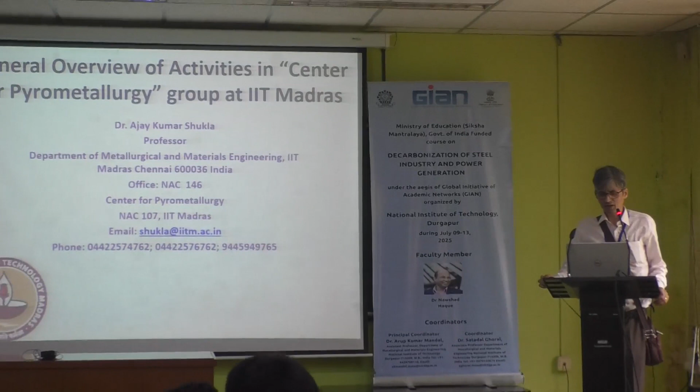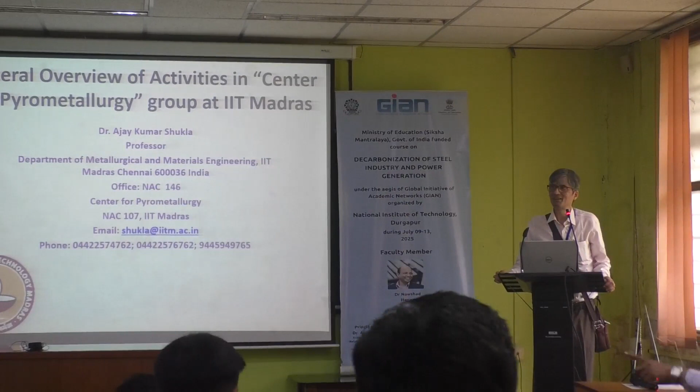So, anybody from DSP? From which shop? Same shop, oh okay. Yesterday I talked to you, and your chair has been taken by him. So basically, I'm in IIT Madras since last 12 or 13 years, working as an academic. You are from ISCO? From which department? I am from power distribution, he's from filter plant, and one guy is from blast furnace. Oh, who is from blast furnace? Yeah, he's coming, he's from Boston.

It is very great to find the blend of scientists, experts from industry and from academia, working in different areas of the iron and steel making supply chain.

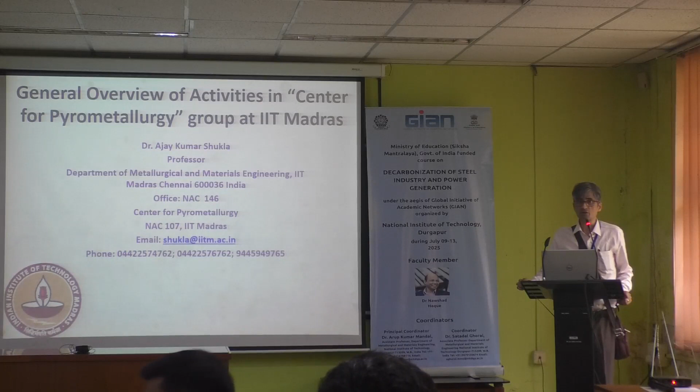Today my discussion will be focused only on the kind of capabilities which my group has, my group had been involved in over the last several years at IIT Madras, as well as due to my past experience in industry and ongoing collaboration with industry and research organizations of international repute like CSIRO, with whom I am working on one of the potential projects of iron ore beneficiation, particularly utilization of synthetic iron ore in the blast furnace.

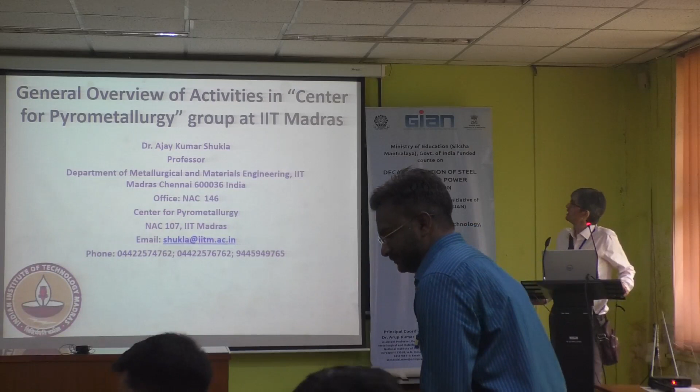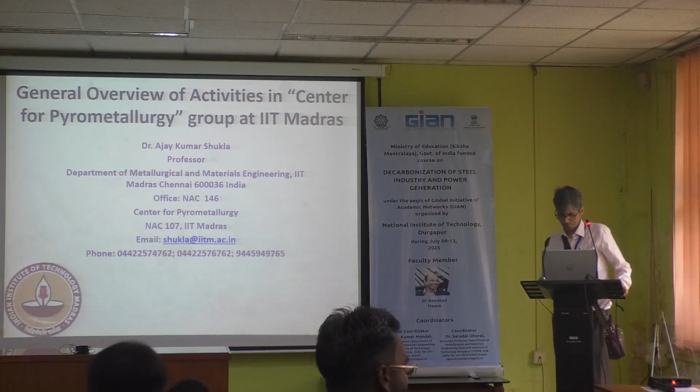So this is the general overview of my activities in my group, that is also named as Center for Pyrometallurgy very recently. This is the general overview of the research theme of my group.

I started my journey with this process metallurgy, particularly modeling, control, and optimization of the iron and steel making area, because initially I was working in the steel making shop at the steel plant, and I took a very deep interest in automation systems, which had a lot of control models that were part of the level 2 automation control system.

As a fresh graduate from IIT, I had a lot of input and background because of my education from IIT Kanpur in those days, and I found it very fascinating. So that is from where I developed my interest in modeling, control, and optimization related aspects.

That involves a lot of mathematical concepts, understanding of concepts related to process metallurgy, and then wrapping all of them into the form of a mathematical model. A lot of programming is also required. In those days, I was doing programming in Fortran, then later on...

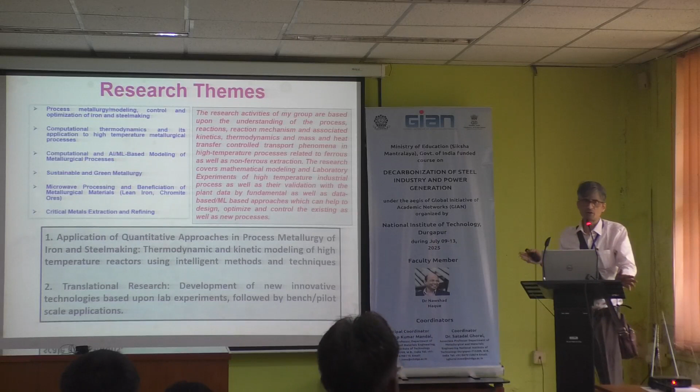I started doing programming in MATLAB, and now there are a lot of programming tools available, particularly for thermodynamics and flow and resource optimization related work. So a lot of tools are there, but my focus is not just to talk about what software has been used, but more on the underlying very basic concepts and principles which are very much relevant to all these areas.

So this is computational thermodynamics and its application to high temperature metallurgy processes. Obviously, understanding of high temperature thermodynamics is an integral part for any extractive metallurgist.

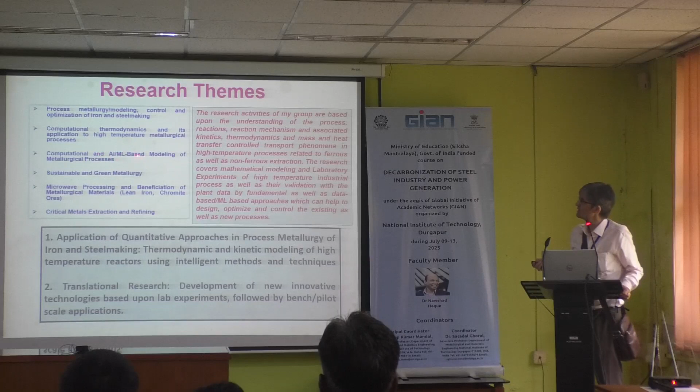Then application of computational models—earlier they were called data-based models, now people call it artificial intelligence, AI, and machine learning based models. Steel plants actually have a lot of data, and there is no shortage of data; data are coming from everywhere.

Data are coming from the field equipment, from one batch of the process to the other batch of the process. Data are coming every second, transient data in terms of various measurements like pressure, temperature, flow rate, composition of waste gas, all those things.

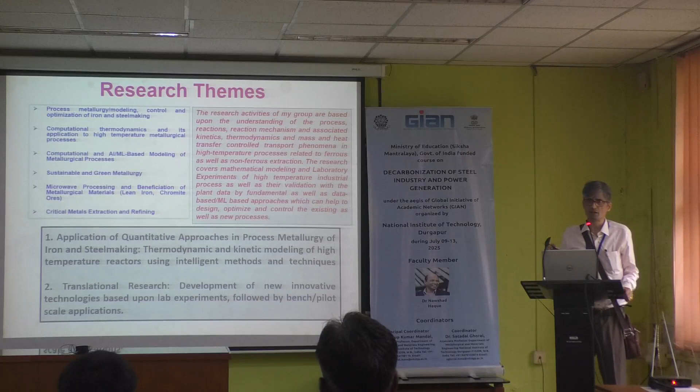So basically we are generating a lot of data, and somewhere those data are going to be a valuable tool to understand the behavior and dynamics of the process. Earlier people were thinking about doing that, but it was difficult because of the limitation on the computational capability of machines. But today we have high computing machines and a lot of development on the front of machine learning.

So basically, we can use this data for understanding the process and its behavior, its dynamics, and suggesting the most appropriate way of working in an efficient manner.

Of course, today people are talking about sustainability and green metallurgy, whether it's green iron making or green steel making, everything is green actually. We don't want carbon anywhere. But how to get rid of carbon in a step-by-step manner is also a challenge, because all the past technologies have been developed based upon coal only. So that will take time, but that has to be done.

One of the projects I have recently worked on is microwave processing and beneficiation of metallurgical materials, particularly lean iron ore and chromite ore. I have also been involved recently in the study of critical metals extraction and refining. I do not have any project right now, but we have the scientific capability, and subject to a tie-up, we can definitely get involved.

So overall, my research activities are based upon understanding of the process reactions and mechanisms, associated with thermodynamics, kinetics, heat and mass transfer control phenomena in high temperature processes related to ferrous and non-ferrous metallurgy. This is my overall capability.

And the research not only covers mathematical modeling and laboratory experiments of high temperature industrial processes, but also involves data coming from large scale industrial processes, if I develop any model for a large scale process like blast furnace, oxygen steel making, or matte smelting process.

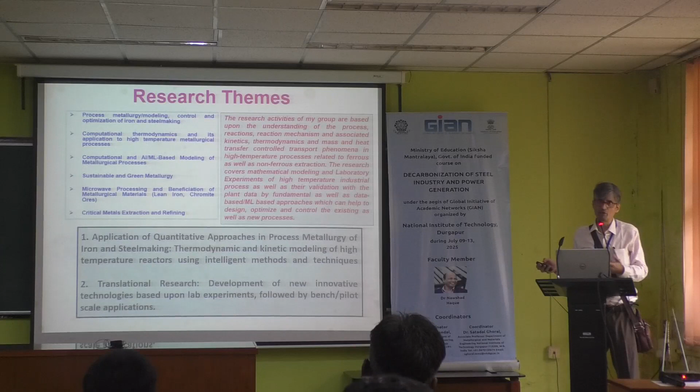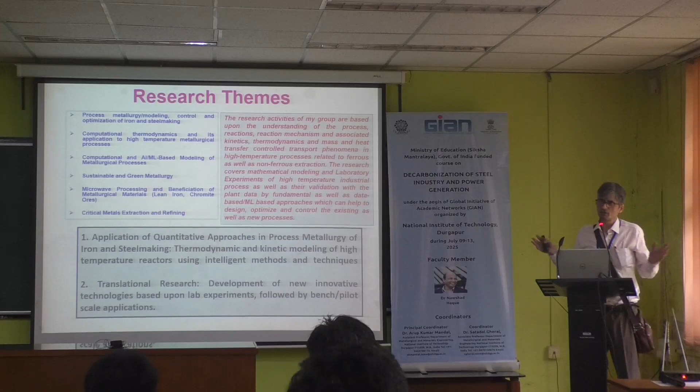I do not know up to what level I will be able to go further. That depends on the support from various institutions, funding agencies, and others. But I am always open to ideas which have been defined in this very broad scope.

So far, these are the projects which I have indicated earlier. The ones in red are, I think, the ongoing projects which have recently been completed or are still ongoing. That means comprehensive mathematical modeling development of the oxygen steel making process, modeling of Midrex iron making process, and industrial validation. These are the projects which are part of the PhD.

Can you kindly explain point number 3? What kind of modeling has been done in iron making, mostly related to blast furnace?

This is a data-based modeling approach to control iron making. Some time back we have taken some data. As far as our capability is concerned, we are able to model and simulate the entire blast furnace reactor by dividing it into a number of zones.

The blast furnace is a combination of a gas-solid reactor on top, followed by a smelting reactor, which is also connected through a combustion reactor. All their mechanisms and interactions could be integrated together in the form of a mathematical model, or as independent thermodynamic modules developed using thermodynamic software, then integrated together through the kinetic flow of streams.

So we have the capability that if you have the industrial data, based upon that data it is possible for me to predict how much coke is actually going into direct reduction, how much is going into indirect reduction, and what is the efficacy of each.

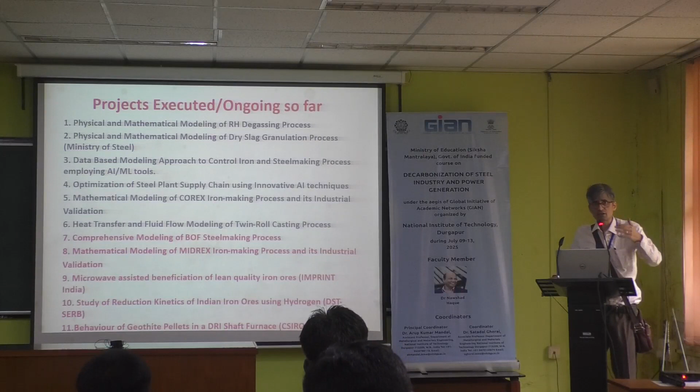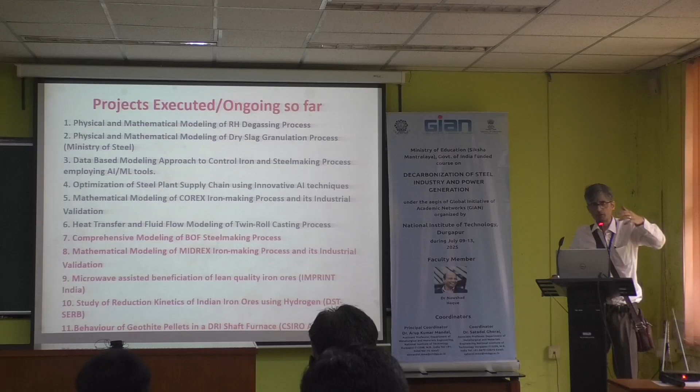But this is not just limited to modification on one front, because the person operating the plant knows better. A lot of things depend on the raw material characteristics, raw material size distribution, the burden preparation, the blending, as well as the sequence of charging. So basically, what problem is there, and where the particular stress should be focused, could be identified. But then it is the job of the steel plant operator to try various possibilities, starting from changing the raw material configuration, and then step by step looking at other aspects. So any process improvement is not so straightforward, but yes, we can identify certain things.

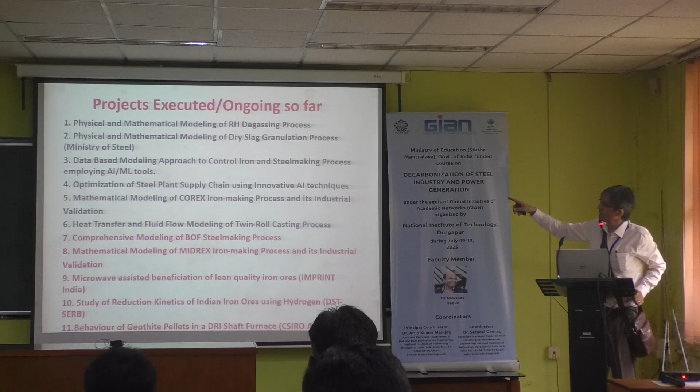Okay, yes. And then again, what I am talking about, the data-based model. The fundamental models work in association with data-based models. That means you cannot incorporate each and every part of your process in a fundamental model, particularly your heat losses. A lot of heat is being lost and the process duration is longer. If you cut down the process duration, your heat loss could be brought down. So any process could be made more efficient if its kinetic rate is increased or its time brought down.

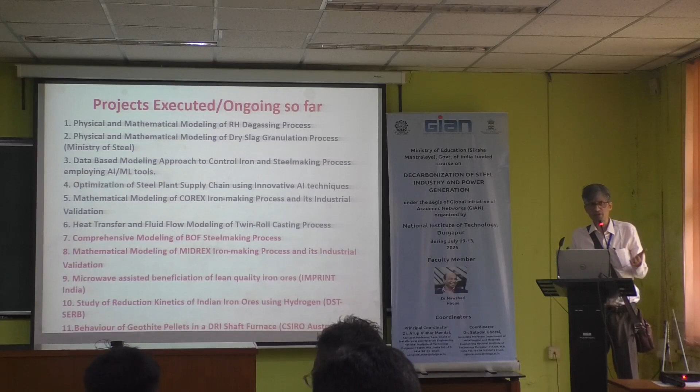To bring down the time duration of the process, you need to understand the kinetics and the mechanism of the process. So these things are going to help everywhere, not only the blast furnace, but in steelmaking and ferroalloy production, wherever there is a high temperature mechanism involving gas-solid reactions or smelting. So that is the thing.

So right now, sorry, I took a longer time. Maybe I will finish quickly in 5-10 minutes because Dr. Nawshad is waiting for us. Okay.

So this steelmaking process, the Midrex process, microwave-assisted beneficiation of lean quality iron ore. This is, I think, a Government of India sponsored project.

Actually, this helped me to create a laboratory which we have named as Center for Pyrometallurgy. Then this project we started, I think 2 years back, on the study of reduction kinetics of Indian iron ore in the loose powder form as well as the pellet form using hydrogen. This is a project supported by the Department of Science and Technology, Government of India. It is still going on.

I think Sham had worked on this project as his MTech. So basically he had already worked on this project. That is why he has been trained on these hydrogen experiments, and it is helping.

And this is, I think, the most important project: behavior of goethite pellet in DRI shaft furnace. That is funded by CSIRO Australia, and we are working with Dr. Naushad and his team for the last 1 year. In this project, this goethitic iron ore is a very common problem for India and for Australia also. And we are trying to study the Australian iron ore from different perspectives.

That means starting from comprehensive mineralogical studies, then rigorous characterization, understanding the raw material, then understanding the raw material under thermal conditions, and then converting this goethitic iron ore into pellets with different operating parameters, and then investigating them under a hydrogen atmosphere, the same way we did it for Indian iron ore.

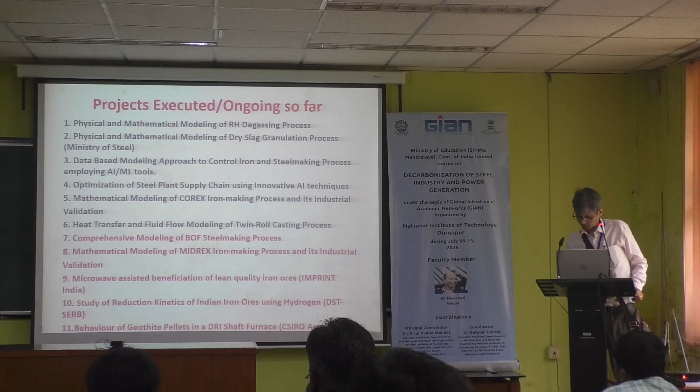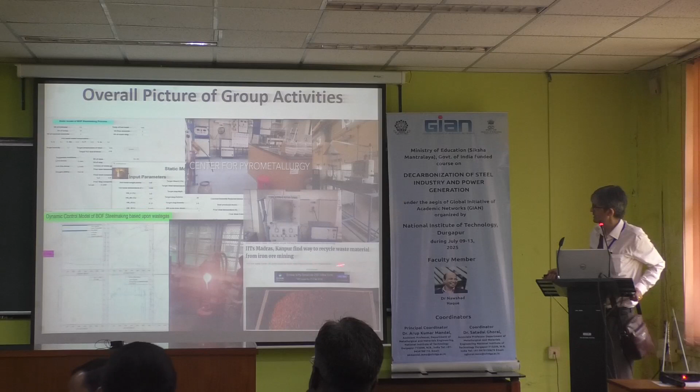So this is the news, I think in Business Standard last year, where we worked with IIT Kanpur on the project of beneficiation of lean quality iron ore using a microwave assisted reduction process, where the proof of concept was established in the laboratory, followed by further demonstration and testing at NMDC at 20 kg bench scale.

And we were able to convert 45 grade lean quality Indian iron ore to blast furnace grade, 61-62% grade, with I think a recovery of 70%. So that is the outcome of it.

So I will just quickly give an overall view. It will address your query that we are working on high temperature processes, because this is the area where I've been engaged for a very long period of time, and my understanding and modeling approach is very simple. If you want to study any high temperature process, you need to understand certain basic things, starting from overall heat and material balance, thermodynamics of the process and kinetics of the process. These are very important, and you need to understand their interaction and their coupling in whatever possible way.

And then a complex process may be based upon permutation and combination of similar building blocks, which I will explain in the next slide. So the high temperature process basically involves heating, melting, dissolution of raw material and flux, because this is the first step that has to happen. And then there is a dynamic interaction between slag, metal, solid and gas phases existing at very high temperature. This is common for all the processes, whether it's a blast furnace, EAF process, steel making or secondary steel making.

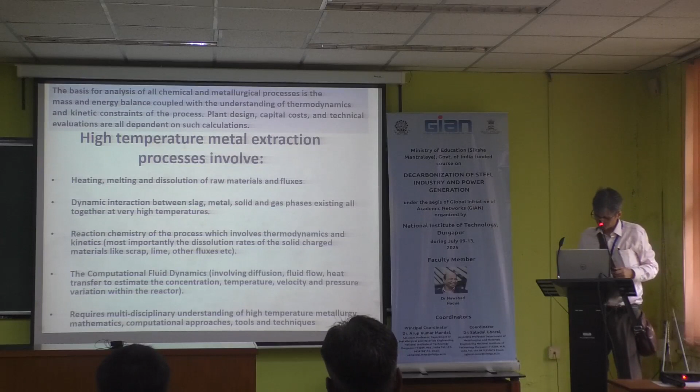But this is not happening in practice, because some part of the reactor is thoroughly mixed and some part is loosely mixed. That depends on the kind of turbulence. For example, the oxygen steelmaking process has very rigorous energies evolved because of decarburization and carbon monoxide bubbles. And the hearth region of the blast furnace can also be assumed to be in almost thermodynamic equilibrium between slag and metal. But in the ladle, the slag metal equilibrium may not be there.

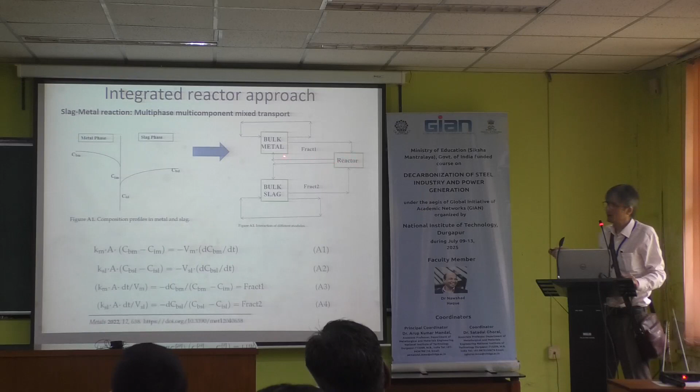They may be non-equilibrium reactors, but because of the high temperature, the interfacial compositions will always be in thermodynamic equilibrium. So this interface will be represented as a thermodynamic reactor, and the flow of streams could be defined at every time step at a certain fraction or rate, related to the mass transfer coefficient. So this is for the slag metal reaction. Similar logic could be applied to gas solid reactions as well.

For gas solid reaction, we adopt a similar approach, but we apply another kind of system where there is an interaction between the rising gas and the descending burden, but not all of the gas reacts with the burden. A part of it gets bypassed because of the kinetic limitation associated with diffusion in the solid, and accordingly we have mathematically translated it and developed a model.

So overall, our group's computational expertise involves thermodynamic kinetic based models using FactSage macro programming. We also use ChemSheet, where the FactSage model database can be integrated into an Excel based VBA solver package. Then also first principle based models using MATLAB and Python, flow sheet based models with METSIM and ChemSheet, and Microsoft Excel also has VBA based modeling capability.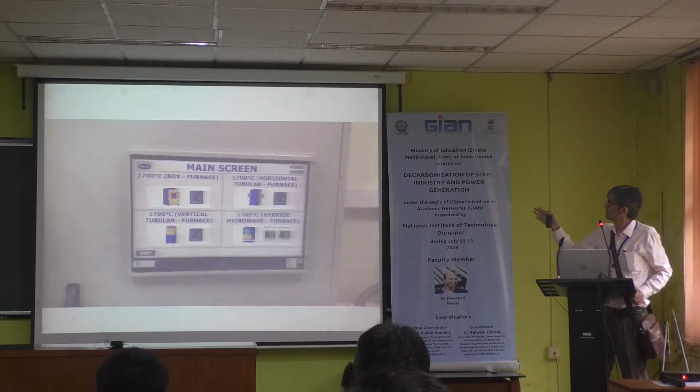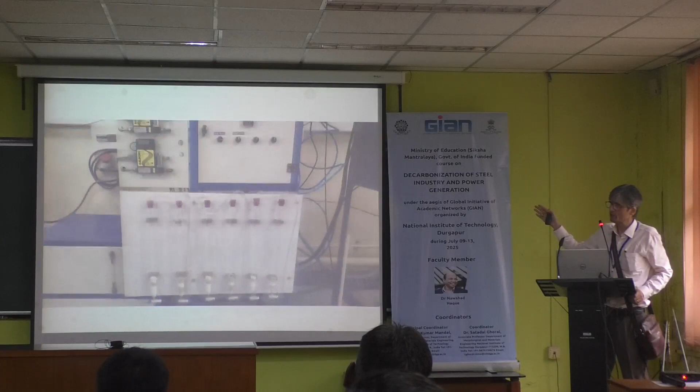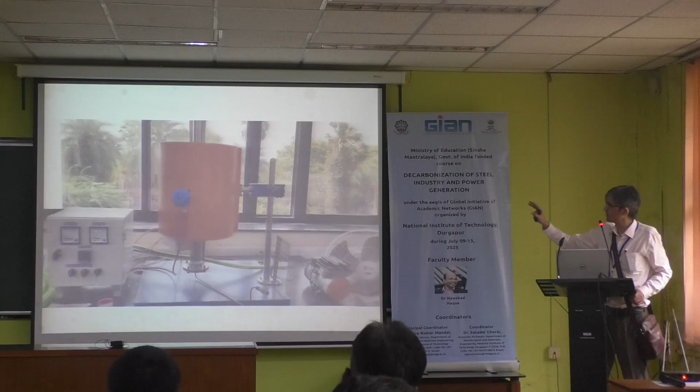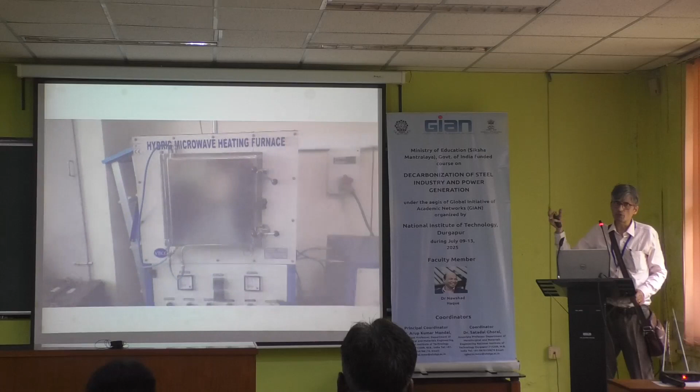Then there are a number of furnaces: a horizontal tubular furnace, and a vertical tubular furnace where the hydrogen experiments are going on. The weight of the sample is measured from the bottom, from the rod, the sample goes into the center, and we can control the atmosphere in terms of carbon monoxide and hydrogen. For carbon monoxide, we don't use a CO cylinder. We have another tubular furnace where we heat coke at high temperature and pass carbon dioxide through it, and in this way we generate carbon monoxide.

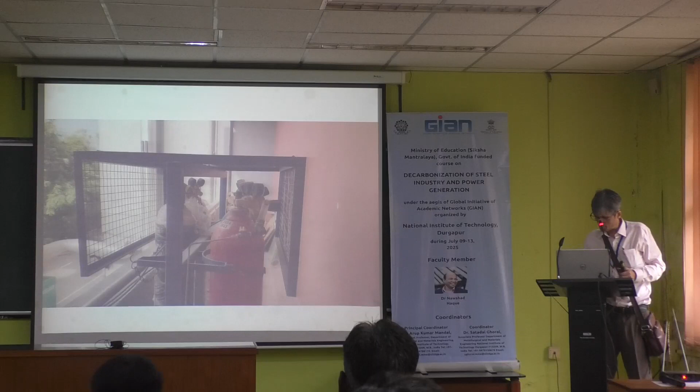These are the muffle furnaces, then the microwave furnace. I will show these equipment in the video. The experimental facilities are: a high temperature hybrid microwave furnace, a high temperature controlled atmosphere vertical tubular furnace, which is a kind of TGA furnace, gas analyzers, a CO generator tubular furnace, jar mill, sieves, 20-ton cold pressing machines for making pellets, magnetic separators, wet high intensity magnetic separator, and Davis tube.

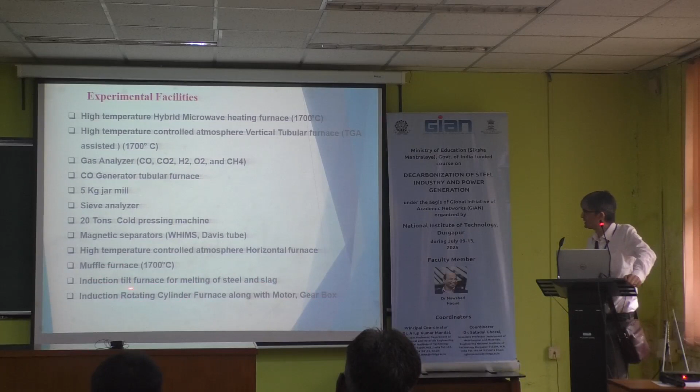We can also control the internal atmosphere of this furnace. For that it is connected to hydrogen, argon and a CO2 cylinder, but the CO2 passes through coke, so it emits CO. Muffle furnace. These are the two smelting facilities: an induction tilt furnace for melting steel and slag, and an induction rotating cylinder furnace, which is for doing dissolution studies. I will show you quickly.

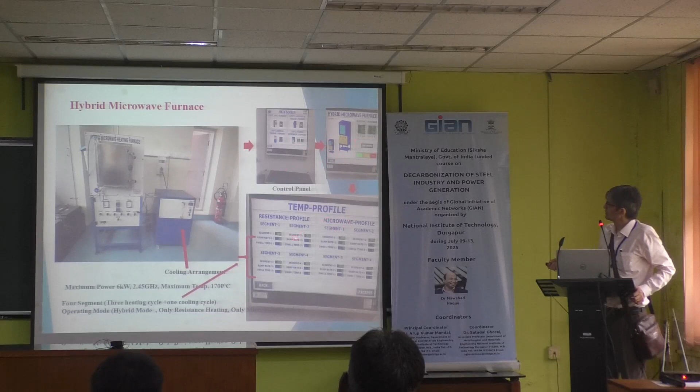This is the hybrid microwave furnace, which can be controlled from the HMI and computer, so the heating cycle can be fixed. This is the vertical tubular furnace, an important furnace which we have used extensively for iron ore reduction by hydrogen. BBCC is the supplier of the equipment. Is it Chennai based? Yes, it's Chennai based. They are working on Make in India.

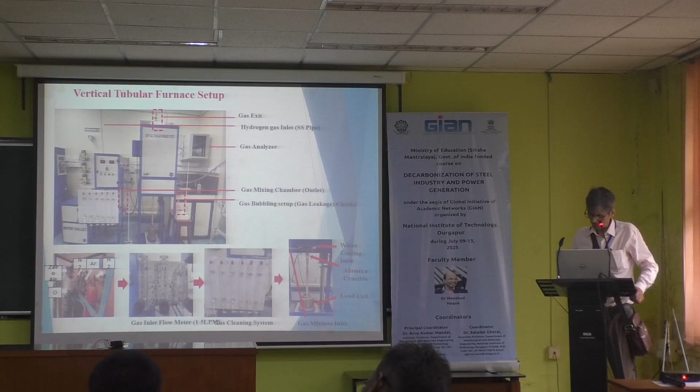These are the components of the furnace. We have a gas cleaning system, a cooling system for the upper tube, and the rod. The rod is connected to the weighing balance, which is connected to the computer where the weight of the sample is recorded every second. While the reaction goes on, there is weight loss. This data, stored as an Excel sheet, can later be studied to understand the kinetic behavior of iron ore reduction under different conditions.

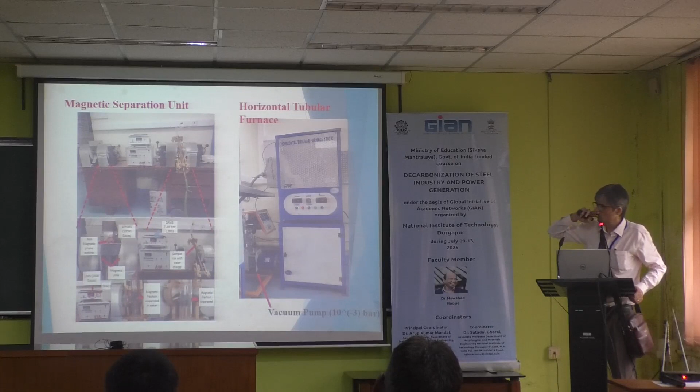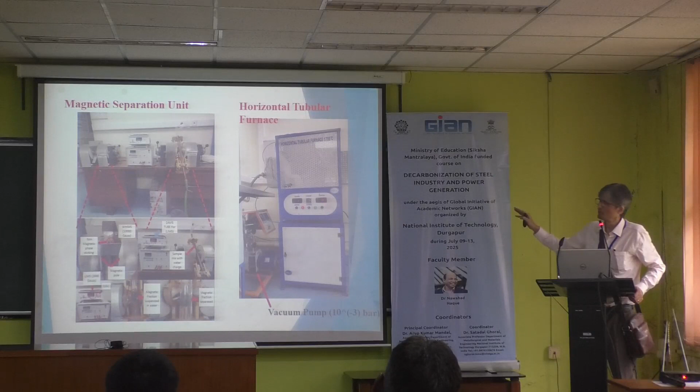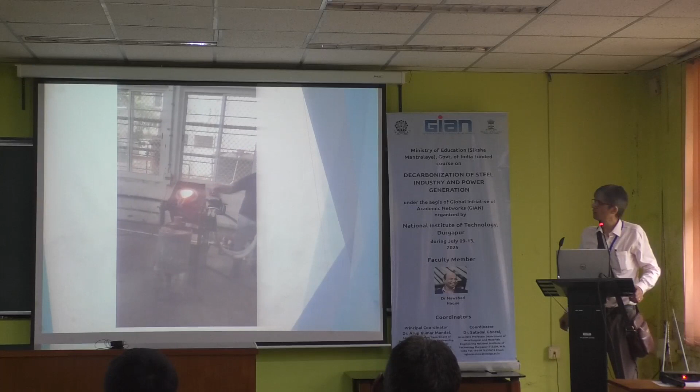This is the magnetic separation unit, Davis tube. This is the tubular furnace assisted with vacuum. We have not used it so frequently, but we have a controlled atmosphere facility, though no measurement while the process goes on, and we can work under vacuum. This is a tilt induction furnace. I will show you the video of it in operation. We tried to melt blast furnace slag, and also investigated a project on dephosphorization in the induction furnace.

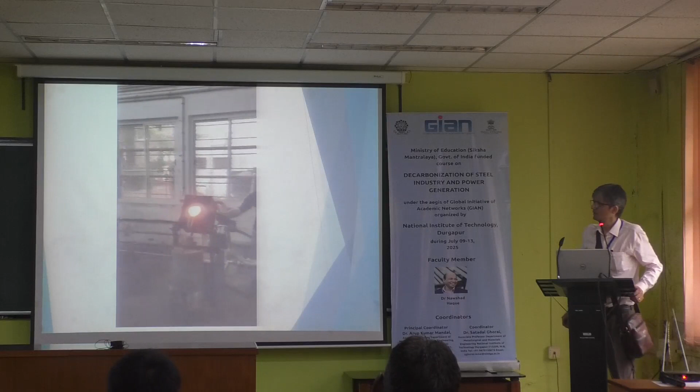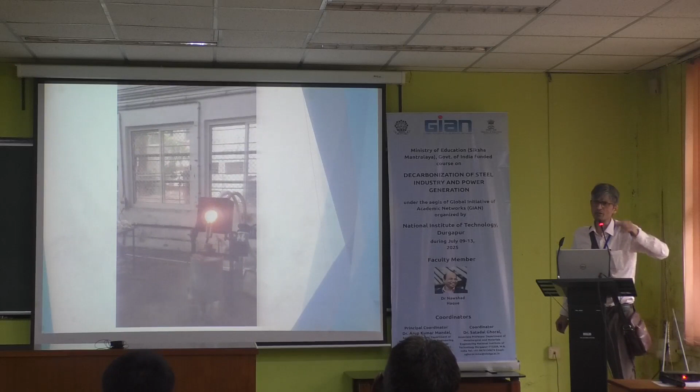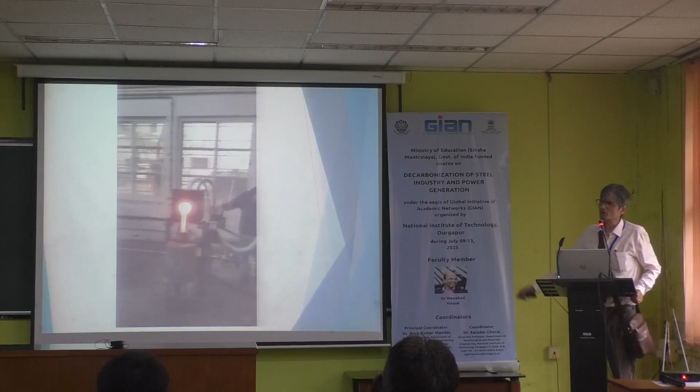We did one or two trials to see what the effect would be on the phosphorus of the hot metal or DRI. By putting cement? No, we have just used a synthetic, I mean we have used a combination of limestone, silica and iron ore together to make a slag of a CaO-FeO-SiO2 kind of system. But again, I think the dissolution is taking a longer time. A lot of silica is getting evaporated. So we are looking for some ready-made synthetic slag that, if you add it, gets dissolved and is able to capture the phosphorus.

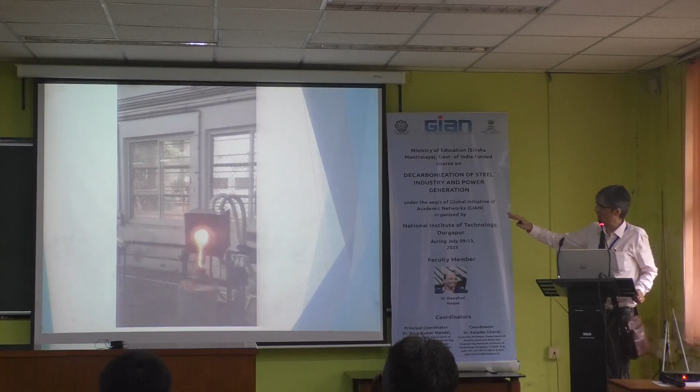We were not able to run this equipment so extensively, but we have that capability. This is a 5 kilogram furnace which can go to 1600 degrees centigrade. So this is a tapping of, I think, melted blast furnace slag. This is the first time we're taking a photograph.

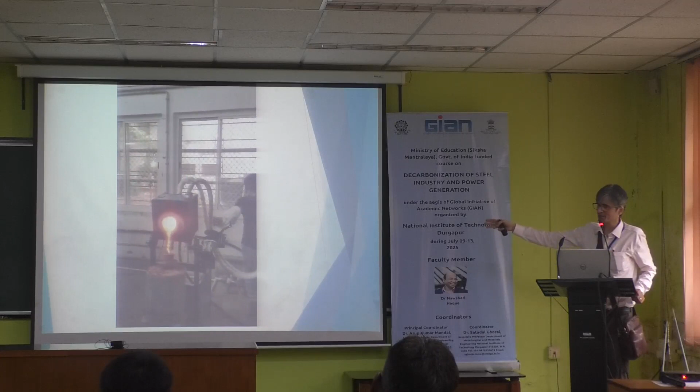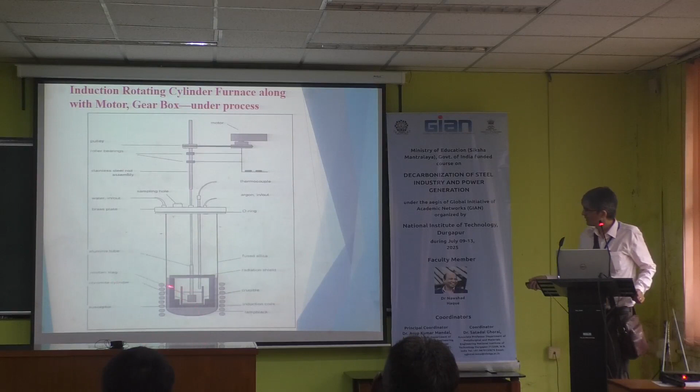And this is the rotating cylinder furnace. Here there's a 1 kg crucible which can hold half to 1 kg of slag or ferroalloy; anything could be melted up to 1600 degrees centigrade. And this is the rotating cylinder. At the tip of the rotating cylinder, one can fit any object which you want to study from a dissolution point of view in this liquid pool. It could be rotated at various RPM, and samples of the melt pool could be collected at certain time intervals.

And so you can understand the rate, for example, of lime dissolution in slag. One can have a lime sample, a cylindrical sample, fitted on the tip of the cylinder, dipped into the already melted slag, rotated at various RPM. These kinds of experiments have taken place earlier, or the dissolution of graphite into the iron melt. So those things could be done.

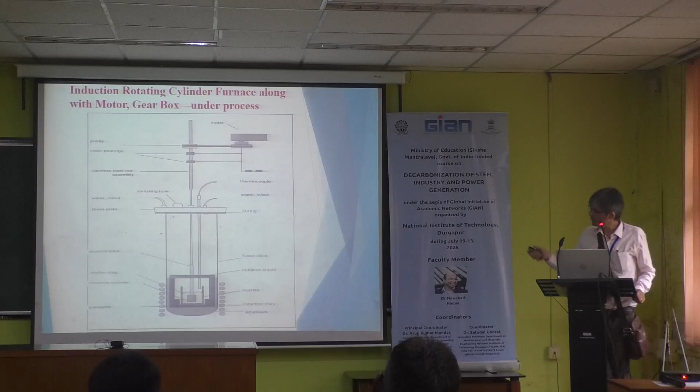We were not able to run this equipment because of non-availability of the appropriate staff, but our objective is to demonstrate that we have these capabilities, and if any industry partner or anybody has any possibility to get involved with us in this work, I will definitely welcome it.

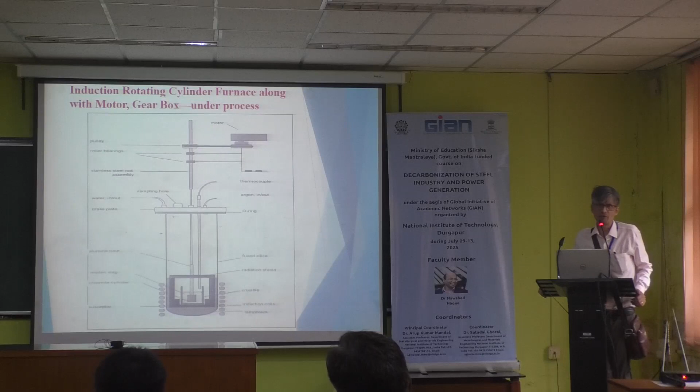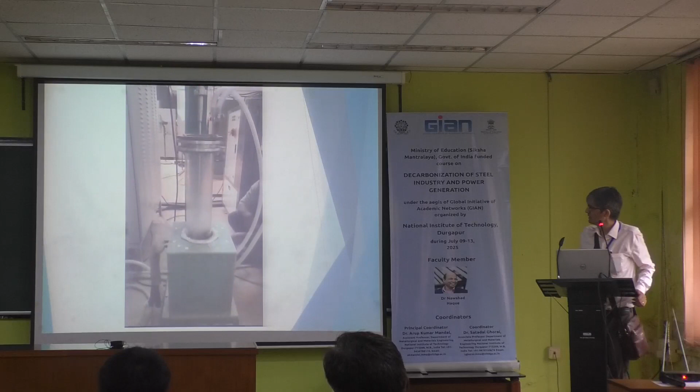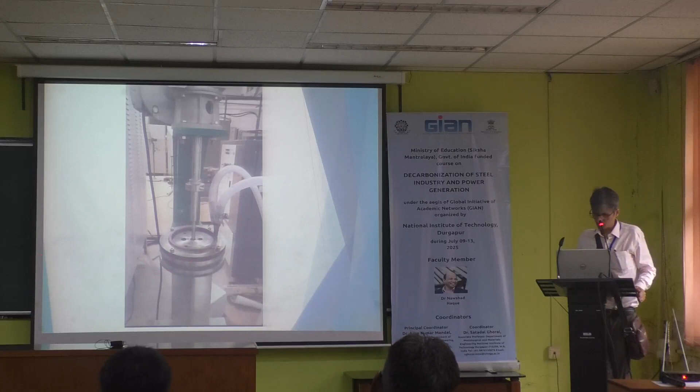So just for example, this is how this setup looks in actual sense. Here this cylinder is rotating. From here we can control the RPM. There are a number of holes. For example, one port would be for argon, so you can create an inert atmosphere inside it. We can also insert a rod for sample taking at different time intervals. Thus the melt sample could be taken and characterized later on. So this was all about it. But I'll just show you one video.

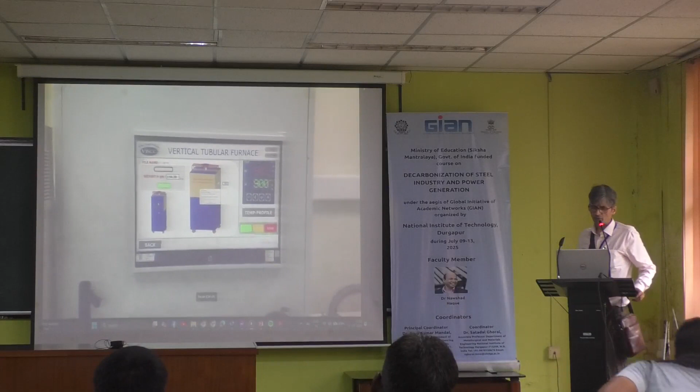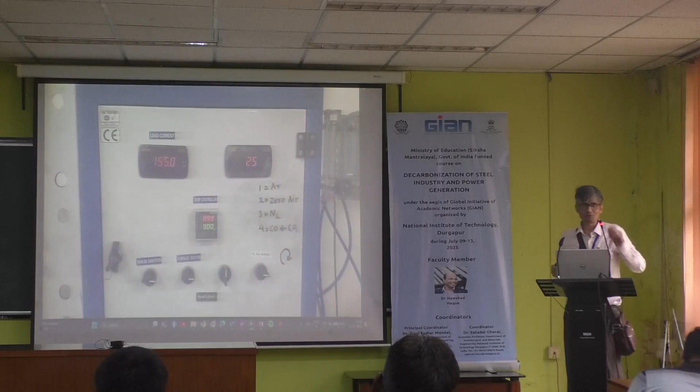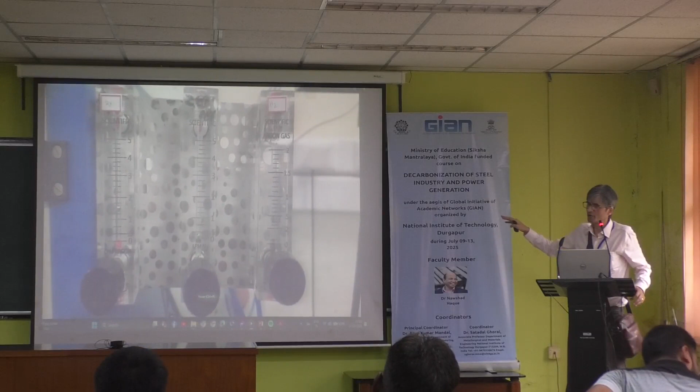This is the operation of a vertical tubular furnace while the hydrogen experiment was going on. I took one video so that you can understand. This experiment is taking place at 900 degrees centigrade in the vertical tubular furnace using hydrogen. Right now we are using a combination of hydrogen and argon together: hydrogen at 10%, 20% and 30%, the rest argon, and the time duration and flow rate have been decided by stoichiometric calculations and by putting some utilization ratio.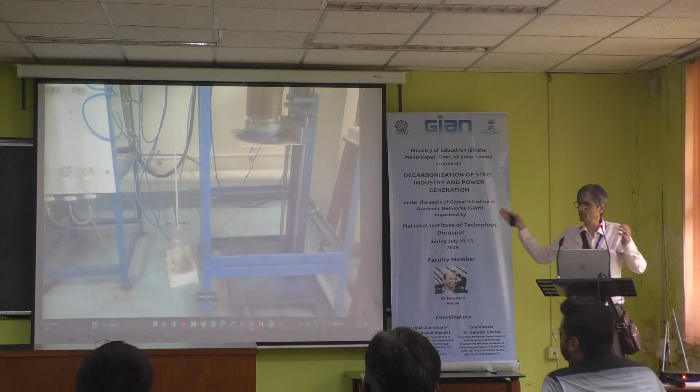For example, earlier my student did the experiment for Indian iron ore, and we were able to find the utilization ratio of hydrogen for Indian iron ore. It is a function of iron content. If it is a better iron ore, that ratio will be lower; if it is a lean iron ore, it will be more. So we used that understanding to decide the duration of the experiment, and we did the experiments and are getting the results to investigate further.

Can you capture the off-gas? Yes, we have the capability, but now it is not working because we need to calibrate it. In the MTech project of my student, it was working. But for this one it's not working. We have called a supplier, but this setup is very useful and we can do a lot of things. It could be a complete input-output balance: if you measure the waste gas CO and CO2, it would give you a complete balance.

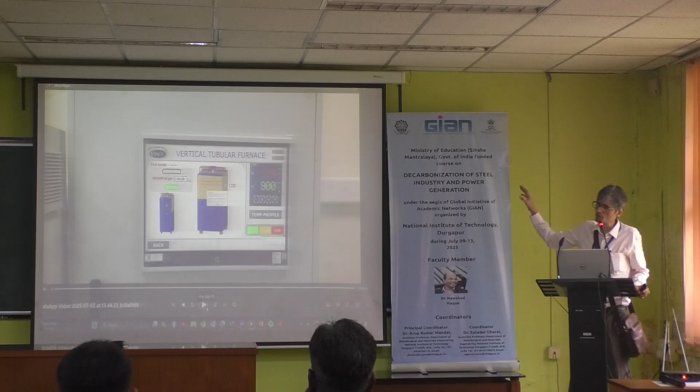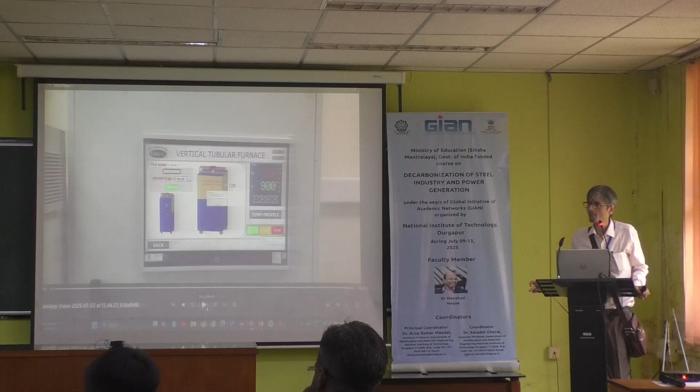Maybe a method to be there at the bottom, where we study the slag-metal interactions. So basically, you will start with the iron ore pellet, which will be a bed of pellets reduced by hydrogen. That will be loaded after reduction, at the same temperature or after cooling, and then directly charged into the metal. But are you using any flux also? No, this is only to study through the induction furnace.

Below this we have a coil, and it gets melted, and then you can study what kind of evolution is taking place, separation of phases. So basically there is a possibility of generation of some amount of slag also. But if the iron ore quality is not good, there will be more slag, and the purity of raw material matters -- you may end up with high phosphorus. Then you need to design the flux chemistry to create a better distribution ratio of phosphorus and sulfur. It's a matter of another fundamental study.

Of course, this FeO will be very high, so in that case phosphorus -- it will help in dephosphorization, but for desulfurization we need to have actual data.

Basically from a fundamental perspective, I started from fundamentals. As I said, it could be any process. For example, I was contacted by a ferroalloy industry in Balasore a few days back -- they have a ferrochrome reactor and wanted me to study it and suggest improvements, because they found more chromium going into the slag and they were not able to release it properly. So they wanted to improve the chromium recovery. Before getting into the project, I asked them to send me ongoing industry data, because I know how ferroalloy processes -- whether ferrosilicon, ferromanganese, or ferrochromium -- are fundamentally similar to how the blast furnace works.

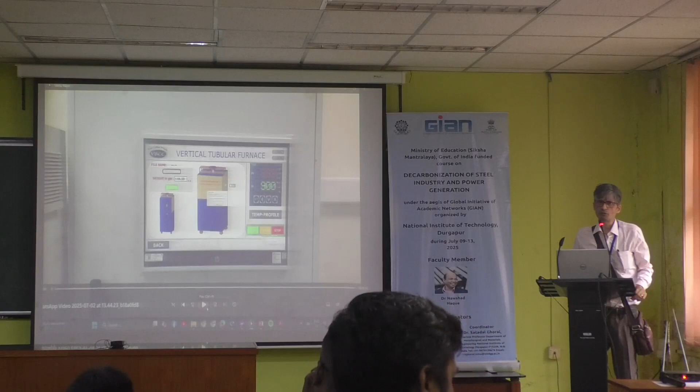It also involves understanding the whole furnace configuration, because heat losses are also going to contribute to the losses -- what kind of refractory lining they are using, what kind of coating, and for how many cycles. This property of refractory lining also affects fuel consumption. And in electric arc furnace or submerged arc furnace, there are voltage-current characteristics -- how current is transferred from the arcing zone to the metal zone, and the mechanisms involved. All these are subject to fundamental investigation by the appropriate experts.

With this I want to conclude, and my final words are: no matter what we do, always focus on fundamental concepts, because that is very helpful -- even experimental results and data can provide better insight if you look at the process from a very basic fundamental perspective.